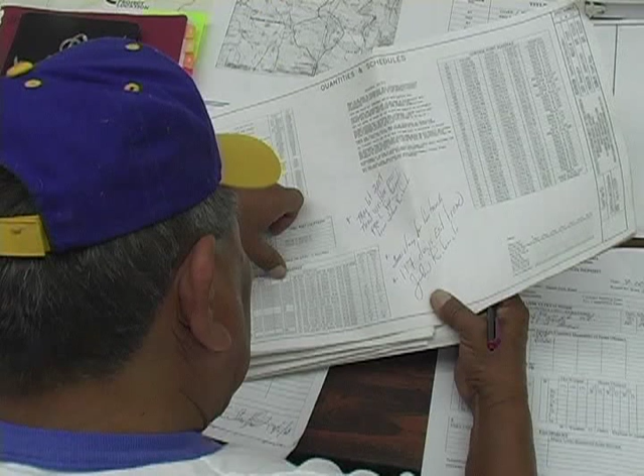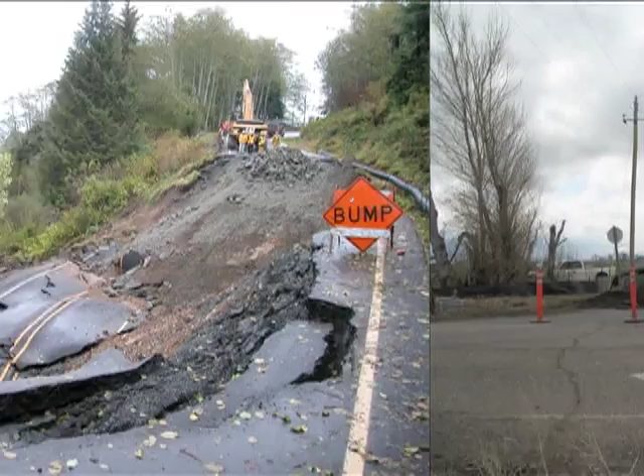The Road Construction Inspector, or CI, has a very important job to do. It is up to him or her to make sure that a road construction project is being carried out as planned, in every detail. Without proper inspection, the final product, which is a road that thousands of people may travel for many years, could fail. This failure may cost your tribe thousands of dollars to repair. Even worse, it could cost residents of your reservation their very lives.

Welcome to this presentation on tribal road construction inspection and documentation. During this program, we'll explain the duties of the construction inspector and demonstrate the proper ways to carry out those duties. We'll closely examine the various reporting forms and other documents that you'll be using both in the field and in your office. The information we're presenting here is also available in the Road Work Ahead guide that accompanies this DVD, which contains more in-depth information on this subject. The guide also contains definitions of some of the terms we'll be using. We've got a lot of ground to cover here, so let's get started.

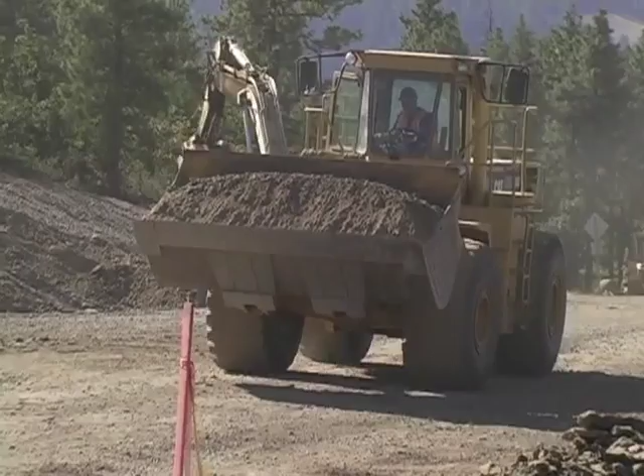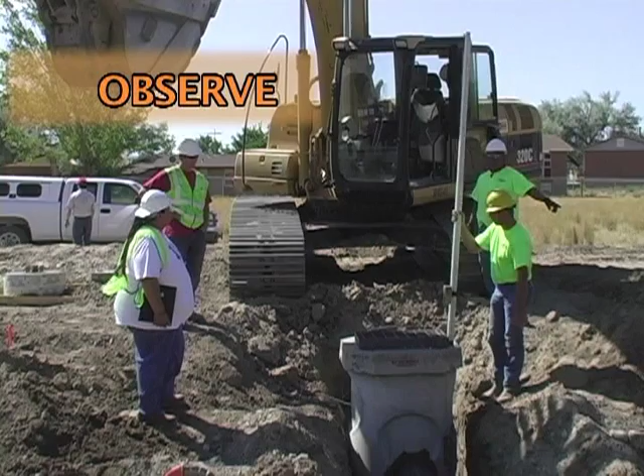To be a construction inspector, there are three basic things you must be able to do: observe, record, and communicate. That is, observe the details of what's happening at the construction site on a day-to-day basis. Record what you observe in a standardized way on a regular basis, and communicate what's happening to other individuals and agencies that need to know.

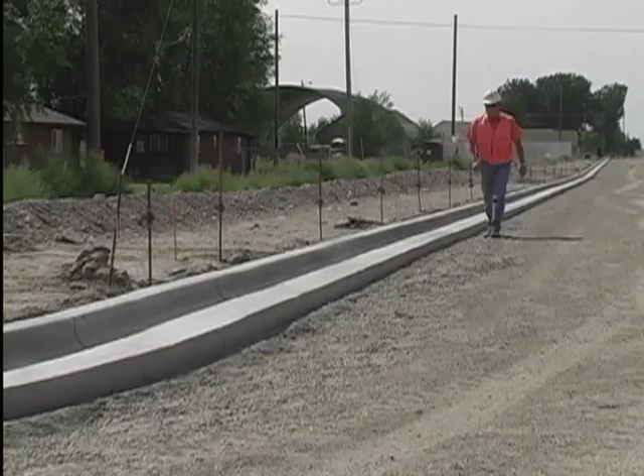In order to do the job properly, you should be the first person on the site each morning and the last person to leave at the end of the day. That way, you don't miss any critical construction activity.

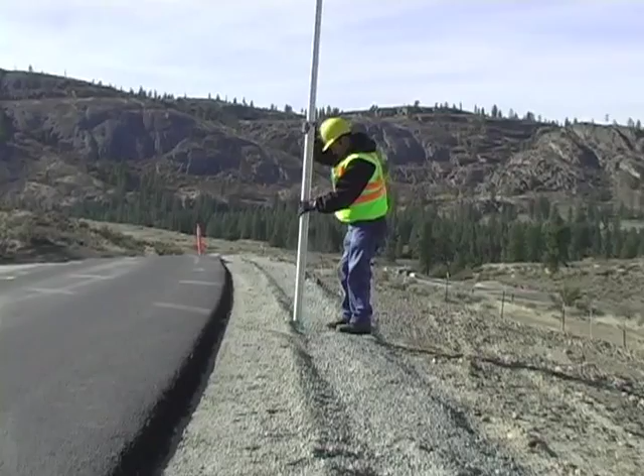The main purpose of these tasks is to be able to confirm and document that the construction contractor is complying with the terms of his contract, which assures overall quality of the project and allows the project owner to make payments to the contractor. Every approved construction project starts with a set of plans and specifications that provide the details on all aspects of the job.

It is part of the job of construction inspector to be thoroughly familiar with these plans and specs. So, before ever going to the construction job site, the inspector must take time to review these documents and mark up or use post-it notes to cross-reference items to watch.

Every construction project accumulates various documents as the project progresses, and these documents must be organized and safeguarded, so they are usually kept all together in the project master file. This file box is something an inspector needs to access almost every day during a construction project.

Now let's review the official duties of the construction inspector. If you have a copy of the guide, you may want to follow along in Part 1.

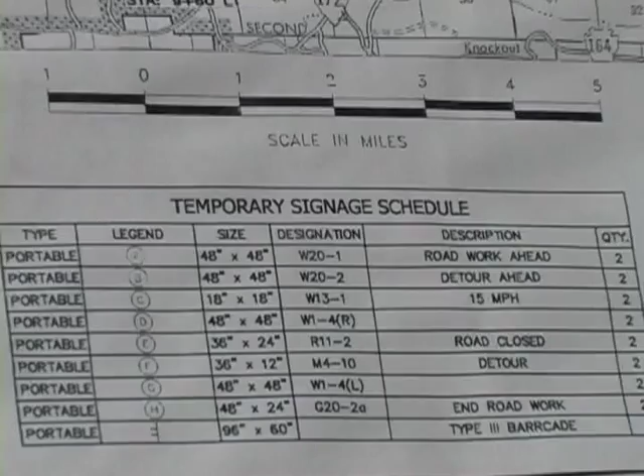Number 1. The inspector must be able to read, comprehend, and interpret all elements of the project plans and specifications. This includes such items as addenda, change orders, detail sketches, temporary traffic control plans, erosion and sediment control plans, as well as sampling and testing schedules. For definitions of these items, check the glossary in the back of the accompanying guide.

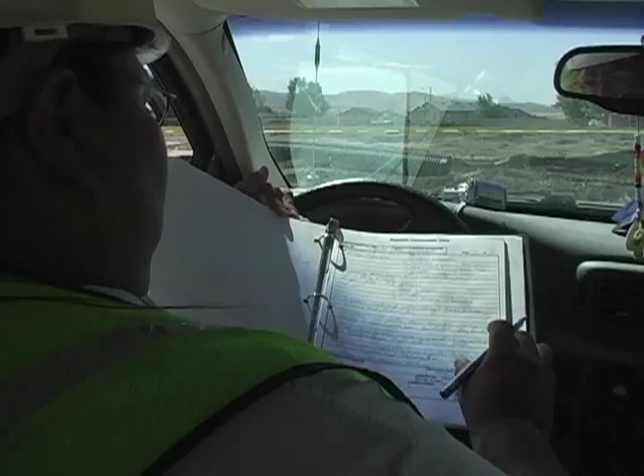Number 2. The inspector must keep and maintain daily construction reports of field observations of construction activities, materials, testings, equipment, employee working hours on the project, delays, weather conditions, unusual activities or events, mishaps, and accidents that occur at the job site, all being referenced to centerline stationing and pay items.

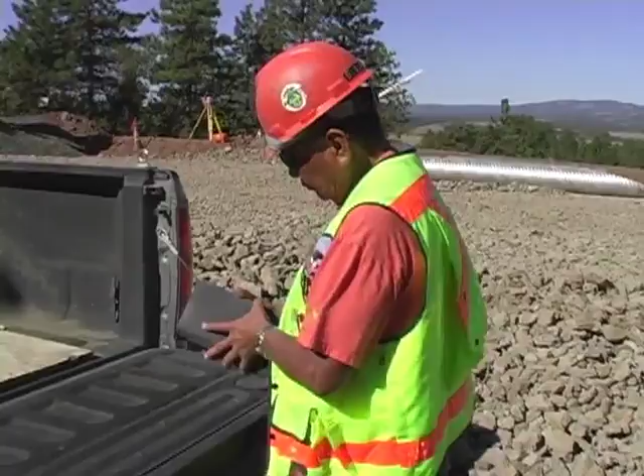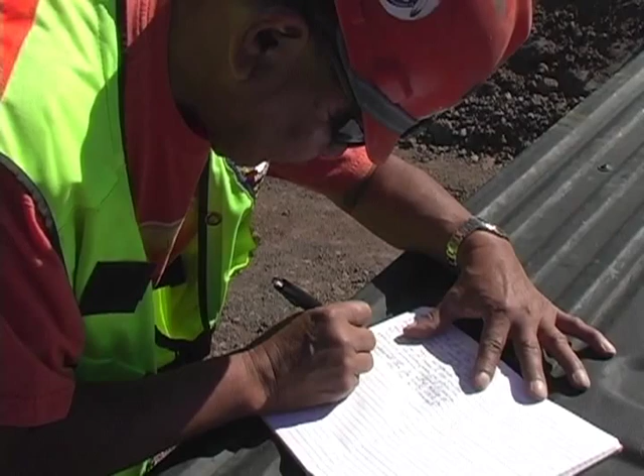Number 3. Keep and maintain a project diary for recording working hours on the project site, data relative to extra materials or deductions, weather effects, list of visitors to the site, conversations and discussions of differing opinions or disagreements with the contractor that may result in disputes or delays, including rejections and reasons. The daily diary should be signed by the field representative each day.

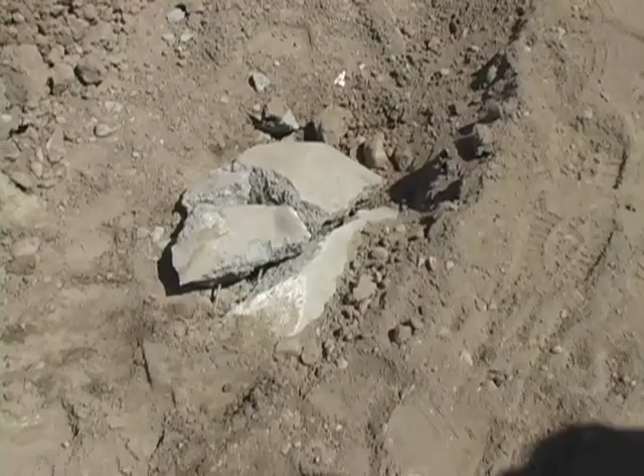Number 4. The inspector must be able to identify and note any unsatisfactory materials or work. Clearly inform the contractor superintendent of any unacceptable or defective work or materials with a written follow-up and copies sent to the COR.

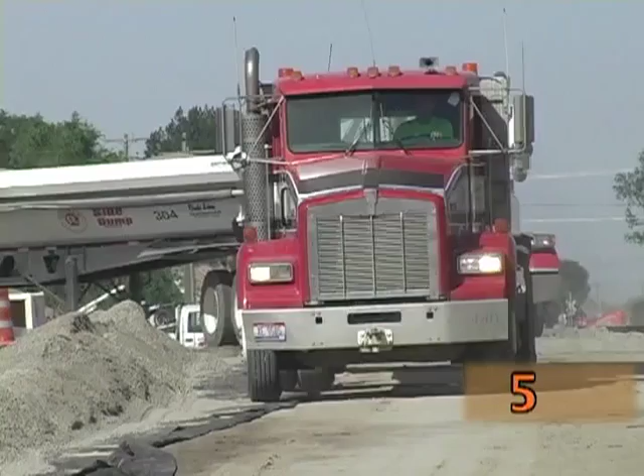Number 5. Check that all materials arriving on the project site are in compliance with the project specification requirements. Obtain test reports, analyses, and manufacturer certificates prior to the incorporation of materials into the project.

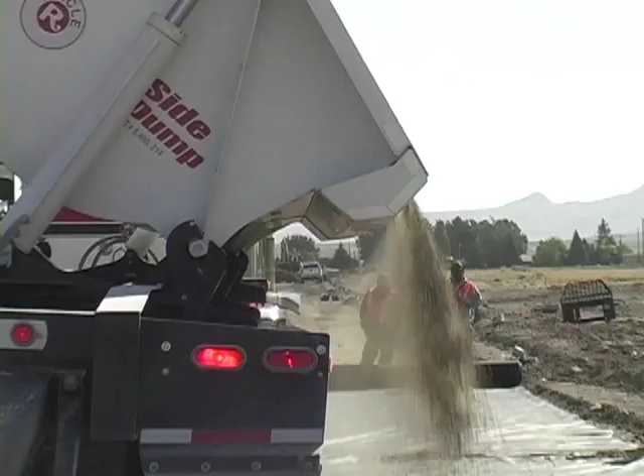Number 6, confer with the COR and contractor on the monthly estimates for pay requests. Verify the work completed and assure quantities indicated on the estimate match the recorded quantities.

Number 7, make sure that all permits are obtained and posters to be publicly displayed are in place.

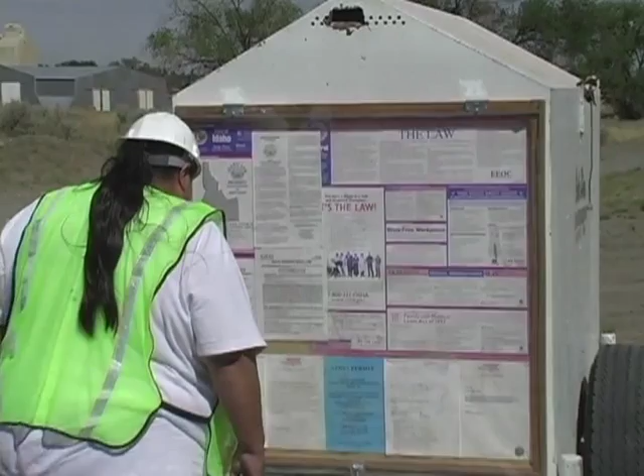Number 8, attend the pre-construction conference, progress meetings, and any project-related conferences when contract work activities permit.

So to recap, can anyone tell me the 3 basic tasks a construction inspector must be able to perform? Observe, record, and communicate. That's right. Now, before we go on, does anyone have any other questions?

If a contractor is out of compliance in the contract, are you supposed to make him stop and tell him what he's doing wrong? No, the inspector can't tell the contractor to stop work, nor can he tell the contractor what to do, and we'll cover this in a little more detail in a few minutes.

The inspector's duties include monitoring the quality of materials and the quality of work, as well as interacting with the contractor's representatives on a day-to-day basis. These duties are as follows.

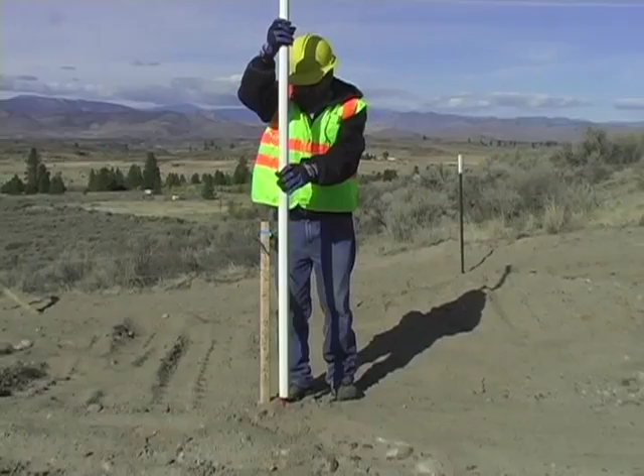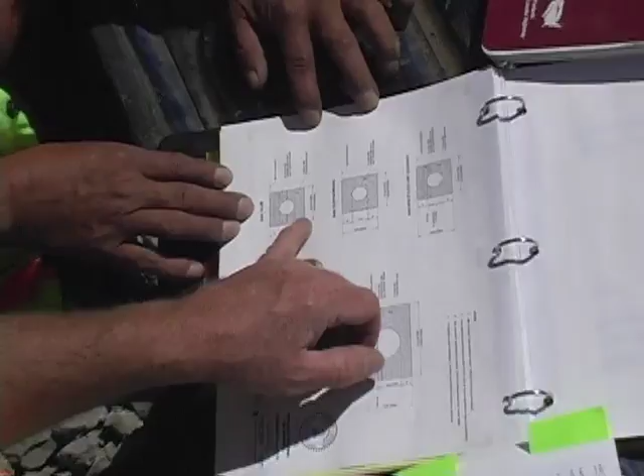Number 1, check stakeout, survey, or other prescribed specifications required in order to perform the work included in the construction contract. Number 2, answer technical questions of the construction contractor, clarifying but not changing the construction contract requirements.

Number 3, measure or verify the quantities of work performed for the project owner's receiving report. Number 4, make qualitative or quantitative judgments that may be required by the contract at the site of the work. For example, determining if specific sections of guardrail can be salvaged.

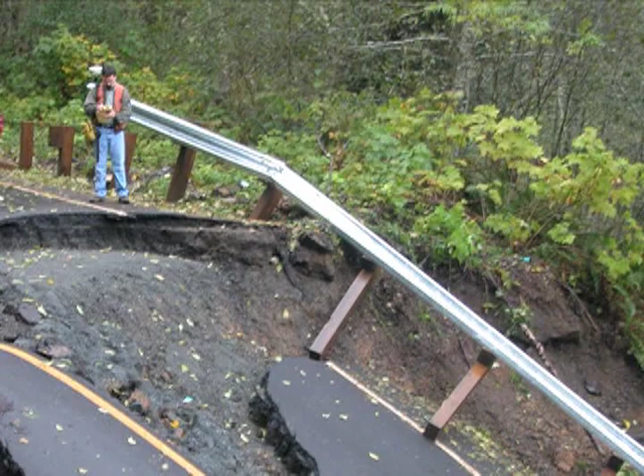Inspectors' duties include providing current documentation on project progress, using systems and methods developed by the tribe, by BIA, or the government agency responsible for the project. This documentation will include these components.

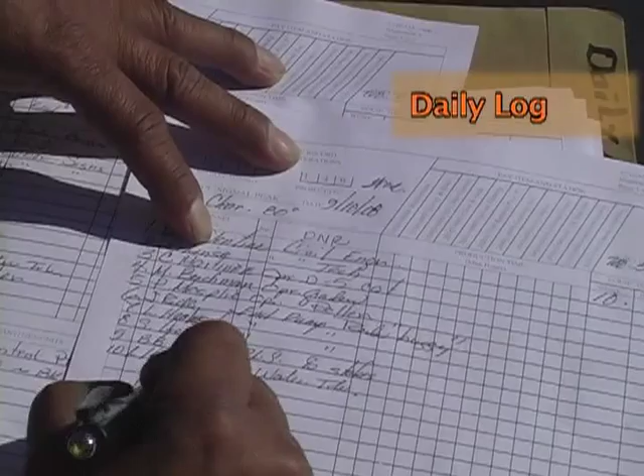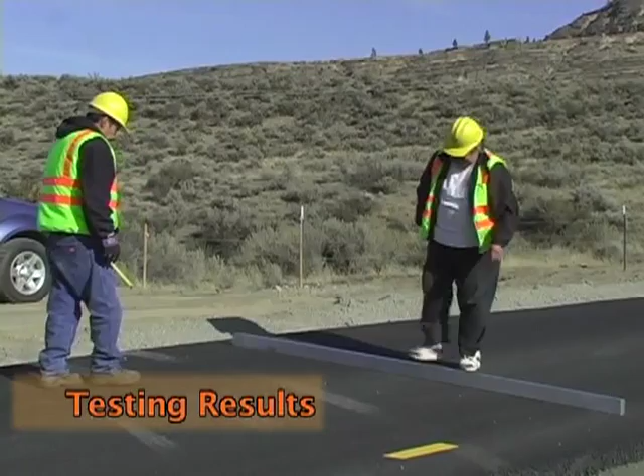Number 1, the inspector's daily diary, which provides narratives of activities, events, and discussions that have occurred at the job site. Number 2, the daily log, which records all contractor activities, including number of hours worked by each contractor employee and equipment location. Number 3, results of measurements, computations, and other activities supporting payment for all items in the contract.

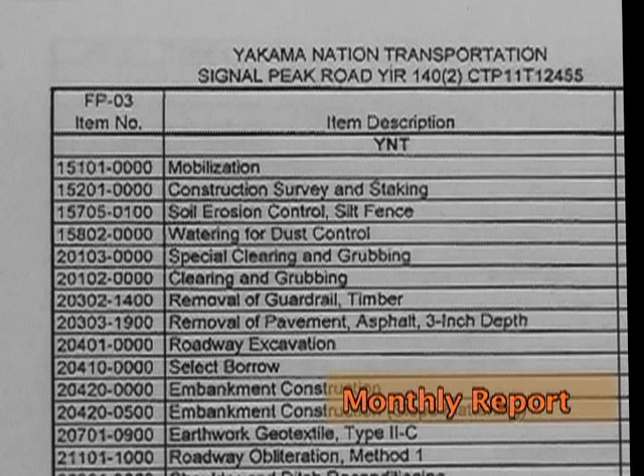We'll cover this in more detail later. Number 4, a monthly report and estimate of quantities to keep the project owner updated on the status of the project. Number 5, test results, measurements, and other documentation verifying the adequacy of the contractor's quality control systems and compliance with the terms of the contract.

Number 6, labeled photographs of the different construction operations, providing a pictorial record of the project's construction stages. We'll discuss this in more detail later.

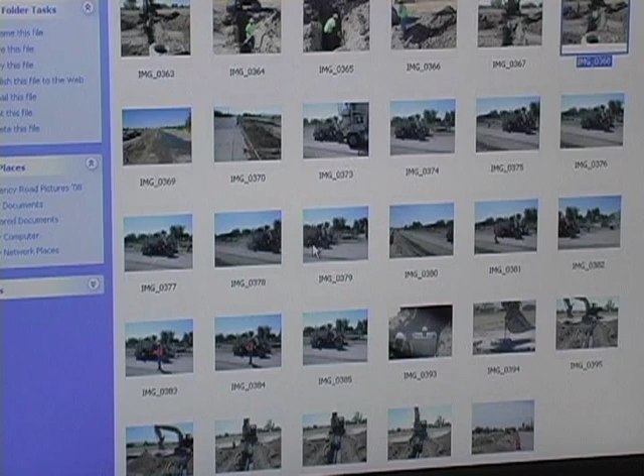Number 7, survey notes and records of other measurements that are for the project owner's final record to check, adjust, or locate the various features of the project as they are constructed. An original of each of these items should be provided to the project owner and becomes property of the project owner.

We had a question earlier about what an inspector can and cannot do on a job site. Inspectors have very limited authority. Essentially, an inspector doesn't have the authority to tell anyone on the project what, when, or how to do anything. Remember, the inspector is there to observe and record.

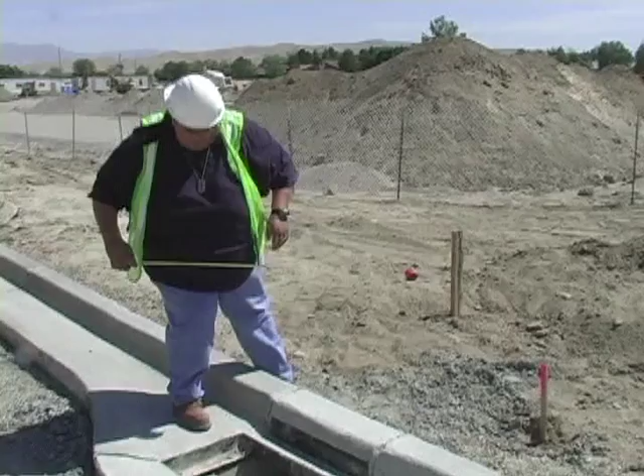Also, an inspector must record any deviation from the project contract plans and specifications and notify the contractor and the project manager. However, as I said earlier, the inspector cannot stop or cause any delays of the work in progress, except for imminent life-threatening situations.

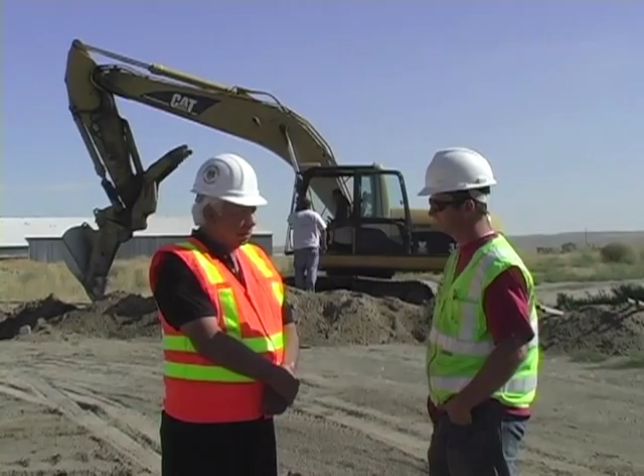Discussions concerning the contractor's organization, equipment, construction methods, or efficiency shall be handled by the project engineer, not the inspector. Also, orders that alter the contract specifications or create additional liability to the project owner must come from the project engineer. The inspector shall not

Advise or give instructions to contractor personnel regarding construction procedures or techniques, but should only ask what they are doing.

What if you see an unsafe practice on a job site? Say a dozer operator is not wearing his hard hat. Record what you observe in your diary, then inform the contractor superintendent and the project manager about what you saw.

It is the responsibility of the inspector's employer to provide the proper attire and equipment for the project. This is for the inspector's own safety and effectiveness.

An inspector must wear to the job site a hard hat, steel-toed safety shoes, safety vest, and other items such as goggles or dust masks when needed. The necessary bound diaries, daily and weekly report forms, and other documents must be provided by the inspector's employer.

Items that construction inspectors often use in the field include infrared thermometer, engineering scale, calculator, measuring tape, and field guide for work zone traffic control.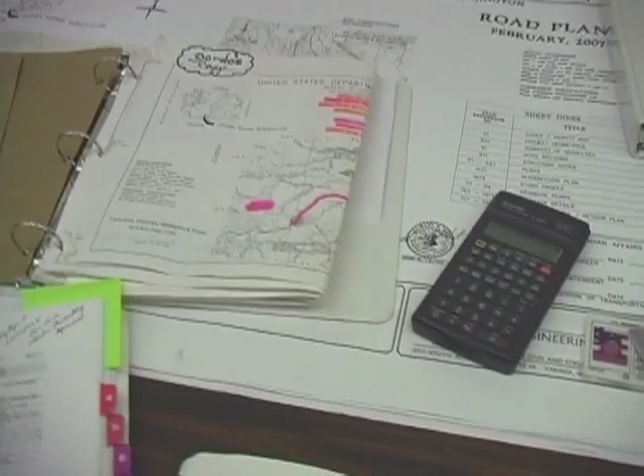The project diary is one of the most important records made during the progress of construction. Diary entries should therefore be factual, concise, complete, legible, and written in ink. When properly maintained, the project diary provides valuable information and evidence when disputes about the project arise later.

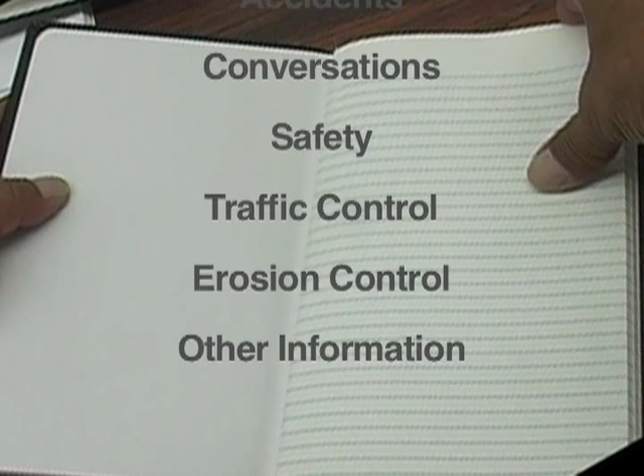You should include the following information in your diary: date, names of visitors to the site and purpose of visit, progress of construction work, explanations of why work was not completed on schedule, accidents that occur on site, the substance of important conversations with the contractor, comments on construction safety, comments on traffic control and signage, discussion of erosion control and other environmental concerns, and any information not covered in other reports that may have a bearing on future developments.

Remember to sign each day's entry with a full signature, not just initials. The diary is considered to be an official government document. It is to be safeguarded and turned in with all other project records at the conclusion of a project.

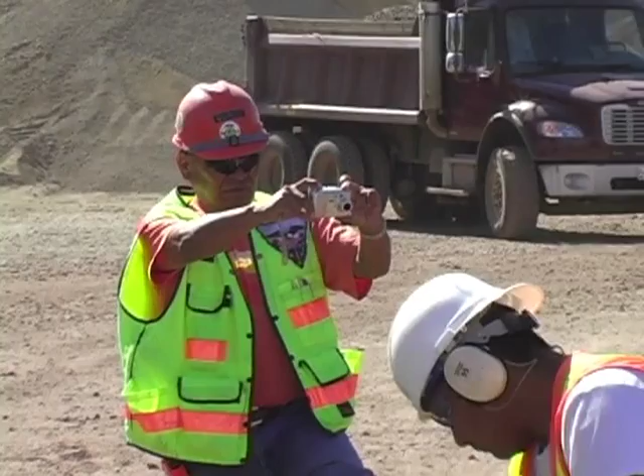The use of tape recorders, sketches, and photographs during construction is considered very beneficial, particularly if disputes arise later. Tapes, drawings, and photographs should be noted in the diary.

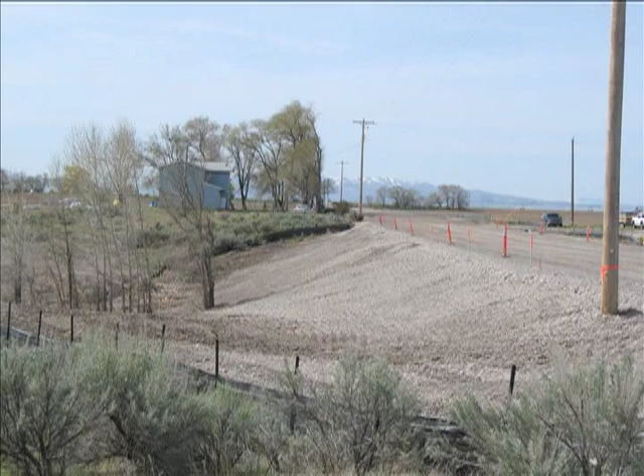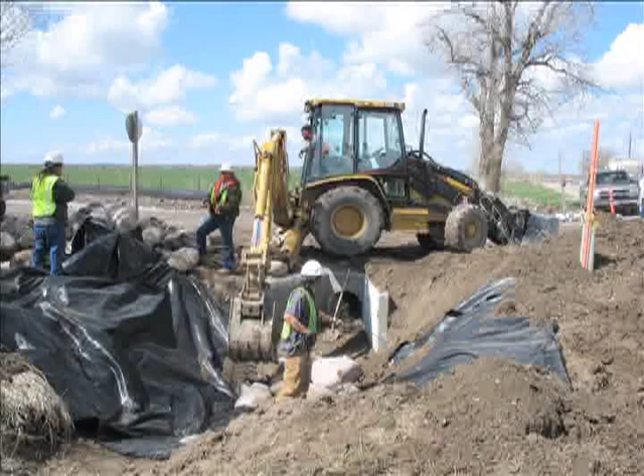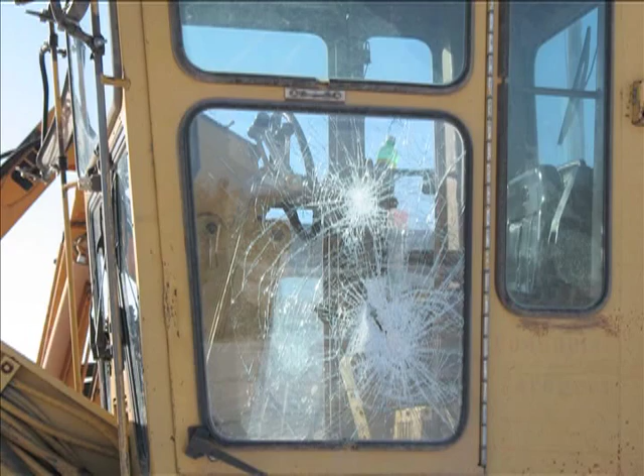Photographs can be an important part of a project's records. The old saying, 'A picture is worth 1,000 words,' applies here. Photos serve to document unusual occurrences, such as mudslides, cave-ins, floods, or actual conditions when a contractor alleges differing site conditions. They can also document unusual construction features, non-conforming material or methods, accidents involving death, personal injury, or property damage, encroachments within the right-of-way, and other such occurrences and conditions.

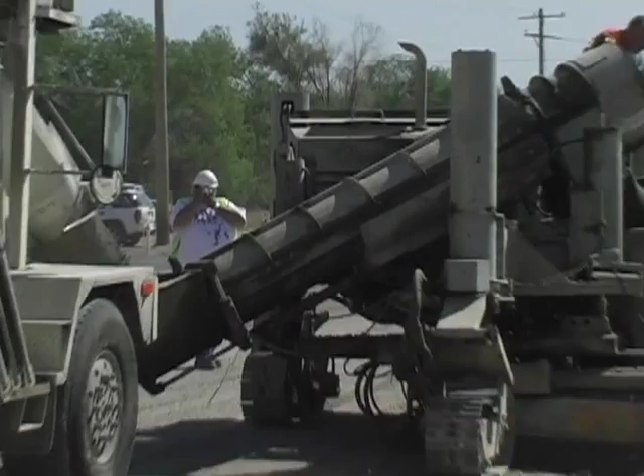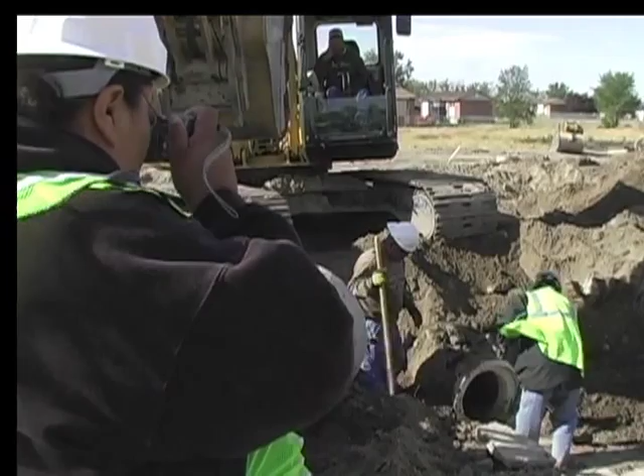They are invaluable as evidence in case a controversy develops during the construction contract which results in litigation. They are especially useful when a construction contract encompasses a long period of time, as much as 2 or 3 years. As memories fade and project personnel are transferred to other projects, photographs provide direct evidence of the conditions that existed at the time the dispute arose.

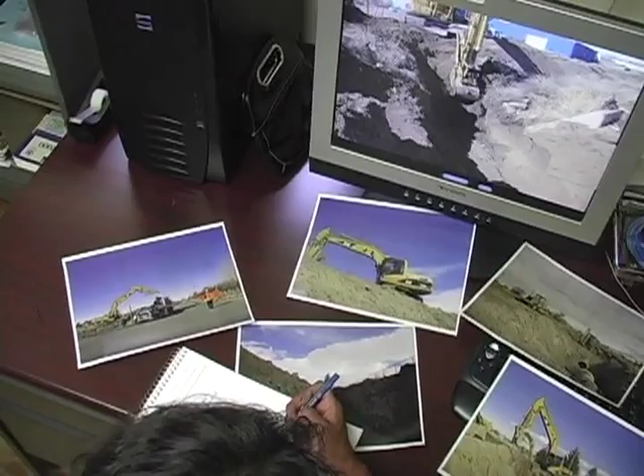Clarity of the photo and good composition are very important, and proper identification is necessary. The back of the photo should be labeled with the name of the photographer, the date taken, and the location. No photo log is required as long as the photos are properly identified.

The daily log is a specific form that must be filled out and submitted at the end of each workday. It summarizes required, specific information about that day's construction activities. In combination with the project diary, the daily log will supply support documentation for negotiation with the contractor concerning contract modifications, price adjustments, and possible claims.

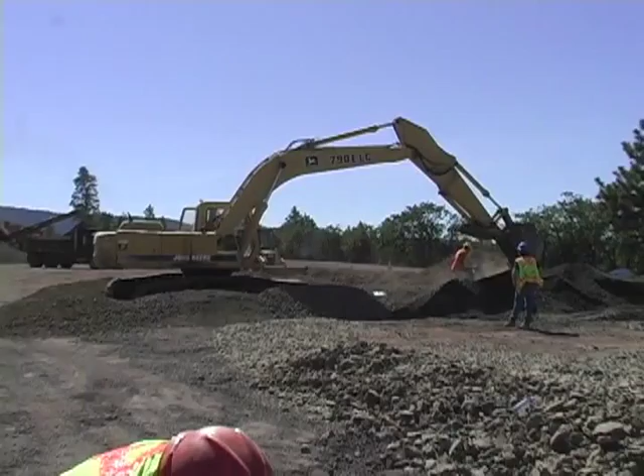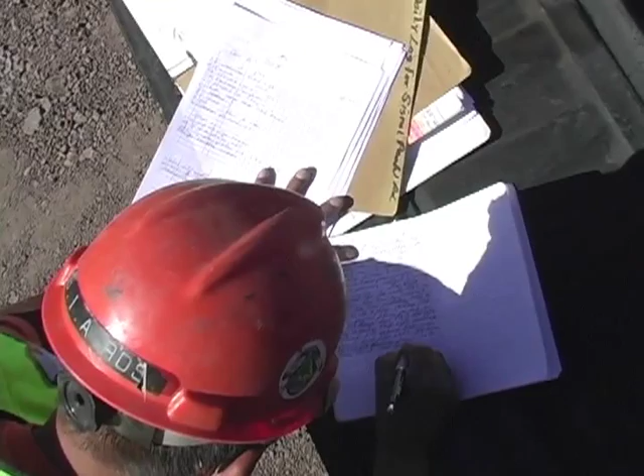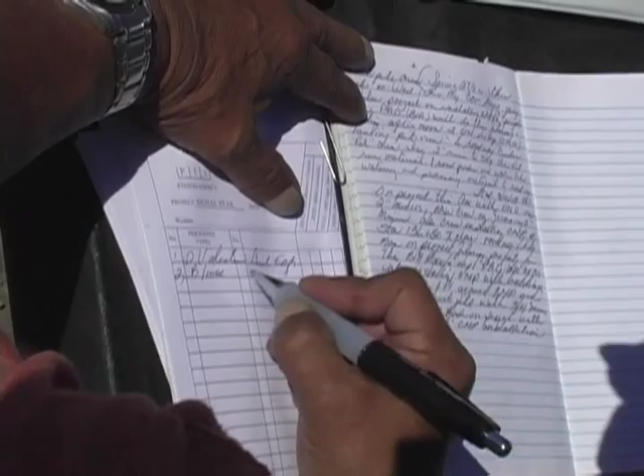Some of the information that goes into the diary will also go into the daily log. One major difference is the diary always contains information about conversations with the contractor or his representative and a narrative description of the work in progress. The daily log, on the other hand, reports the day's weather conditions, locations and number of men, which equipment is working and which is not, and the amount of production.

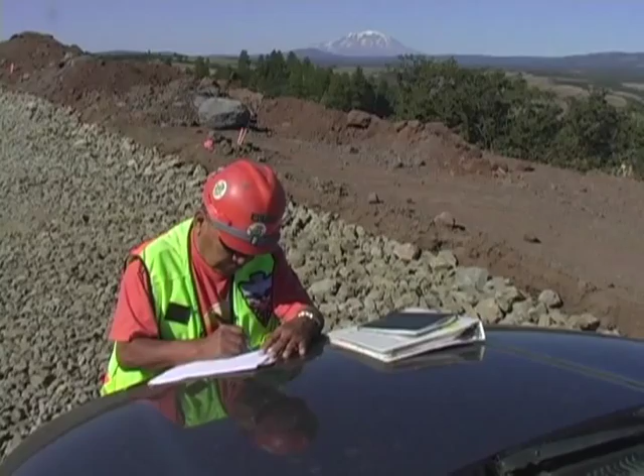The daily log shall be used to document the details of all construction operations that require inspections for conformance with plans and specifications. This form provides a concise, readily retrievable record of equipment time and man hours for each significant construction operation underway on the job site.

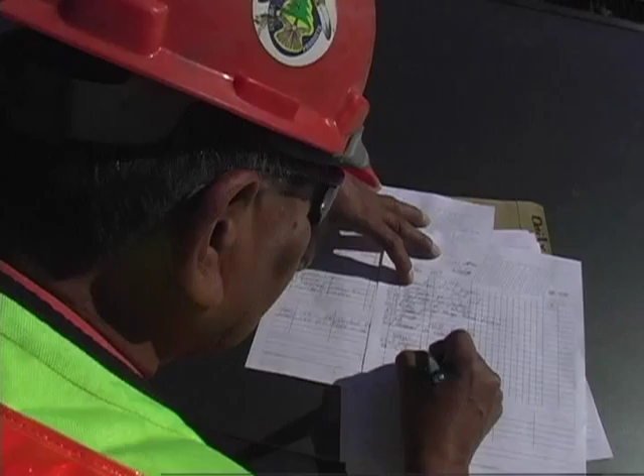This record will help verify contractors' costs to justify payments, adjustments, or claims. An important fact to remember is the failure to record an event in the log carries with it the implication that the event did not occur or was insignificant, and also threatens the credibility of the entire log. The inspector's daily logs are to be filed in the project master file at the completion of the project.

Question: Do weather conditions go in the diary as well as the daily log? Answer: You can put them in both if it's helpful, but that information is required in the daily log.

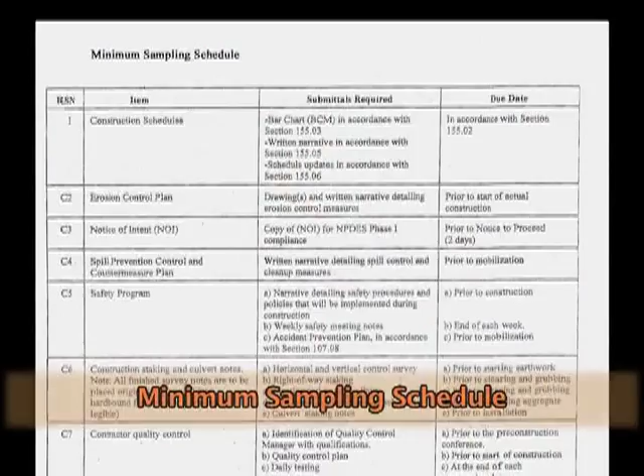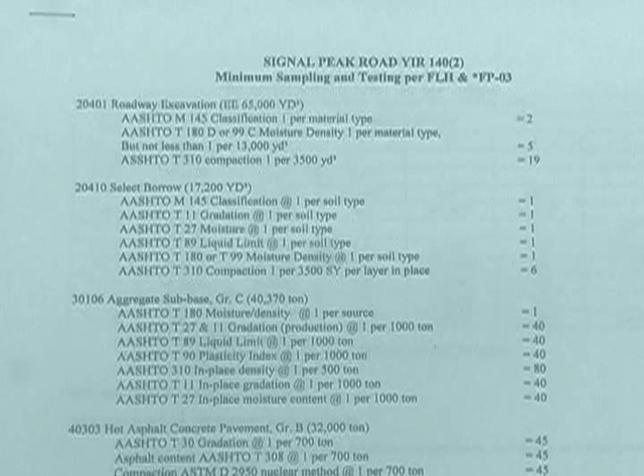A part of the project specs for every construction project is something called the minimum sampling schedule. This document contains the requirements for minimum testing and sampling of materials delivered to the project. It dictates what type of materials testing and sampling must be done, and it is part of the inspector's job to track these items.

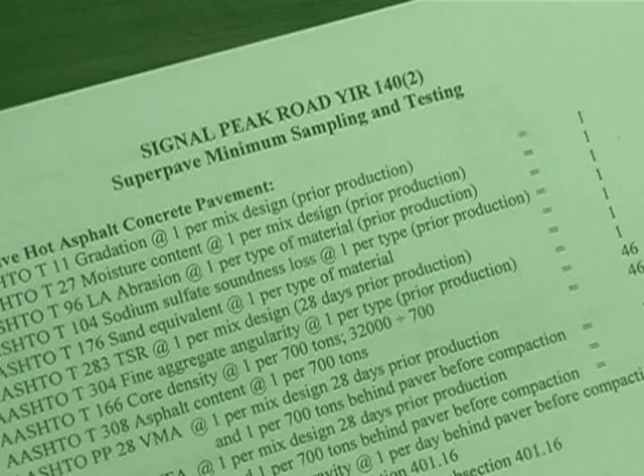The purpose of the sampling and testing performed on the projects is to determine whether or not materials being used match the project specification. There are several items used to document sampling and testing on the project.

First, there's the daily volume record. You use this form to record the delivery of all materials for the project. It provides spaces to enter the load number, truck number, time of day, location, and the volume of material. Material receipts and weight tickets that come with every load are stapled to the back of this form because they verify what you've entered on the daily volume record.

A new daily volume record sheet is started each day of the project.

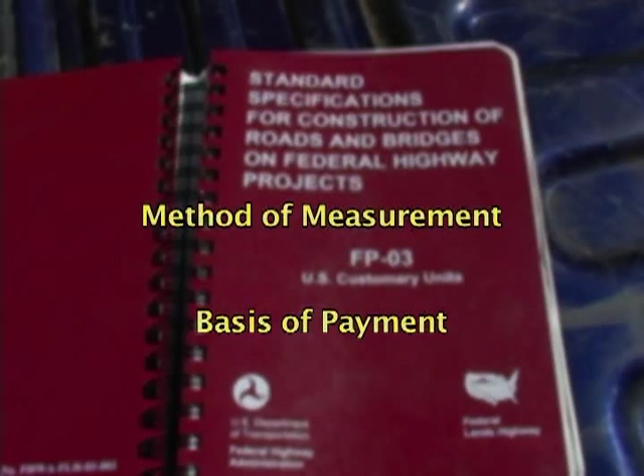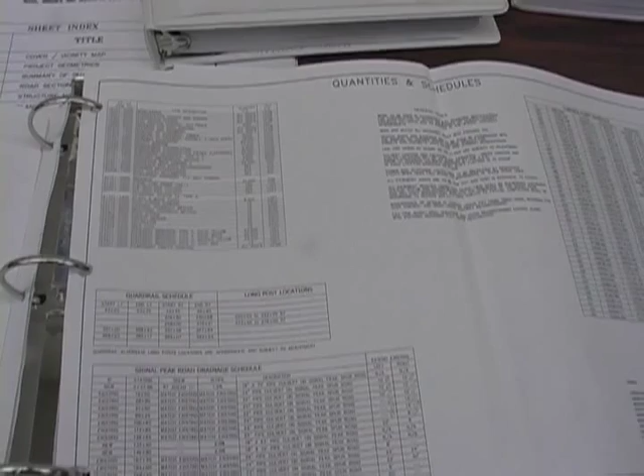Project specifications contain sections labeled Method of Measurement and Basis of Payment for each item of work. These dictate what units of measurement are to be used for the materials and on what basis a contractor can be paid. The daily volume record is used to track these items and to check against planned quantities.

These records are transferred to the daily log each day.

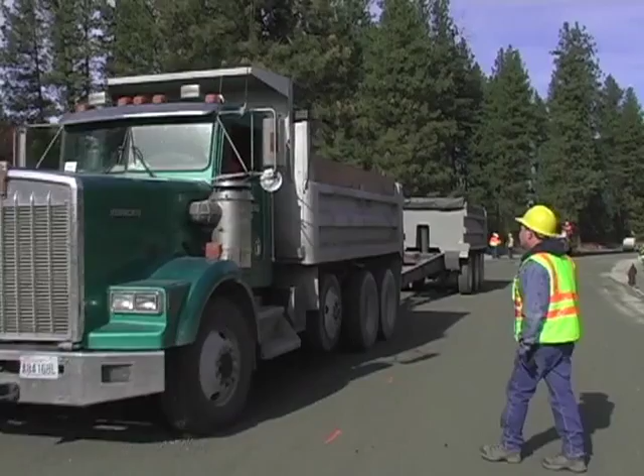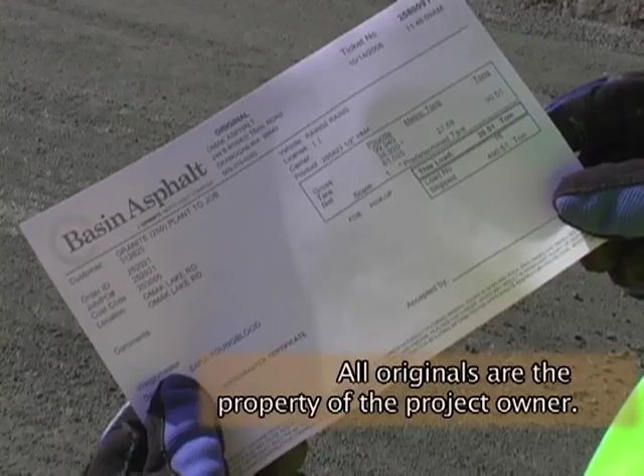The construction contractor must provide certifications of compliance for all materials to be placed on the roadway before they are installed. These certificates are to be retained at the job site and are to be included in the project master file. Inspectors must assure that every delivery meets specifications by checking the bill of lading. More specific instructions about asphalt inspection are located in the accompanying guide.

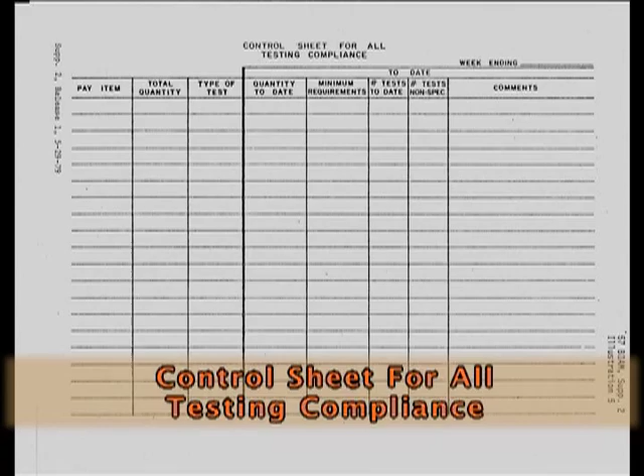Next, there's a control sheet for all testing compliance for each project. This sheet indicates the minimum tests to be taken for each item of construction to assure that adequate samples and tests are conducted during each phase of construction.

The original of this form is maintained by the inspector, and a copy is submitted weekly to the project manager.

Not all projects require the placement of culverts, but on those that do, detailed records of their installation must be kept. A document known as the culvert book is the primary source of information regarding the installation of culverts, if project plans call for them.

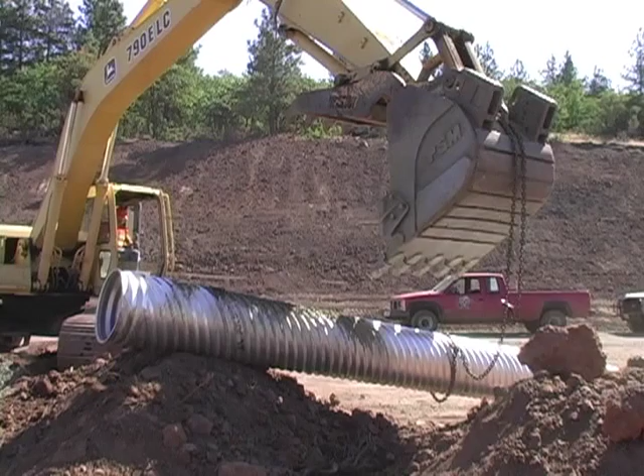Using the project ledger pages for documentation, records for the culvert book include the record of structural excavations if payment is provided for, complete and detailed stakeout notes for each installation, including sketches, stake locations and offsets, and information on stakes, and description of structure such as cattle guard, culvert, reinforced concrete box culvert, bridge, catch basin, drop inlet, etc.

References to material certification must be included, along with size, length, location, skew, invert elevations, grades, date of staking, and date of installation or construction of structure with test notation and results.

Finally, quantities of rock, steel, and/or concrete, slope protection, riprap, or other items used in conjunction with the structure.

The weekly construction report is a valuable tool for summarizing key information on a weekly basis. This report keeps the project owner and the contracting officer up to date on the project's progress. This report calls for very specific information to be summarized and generally covers major portions of the project as follows:

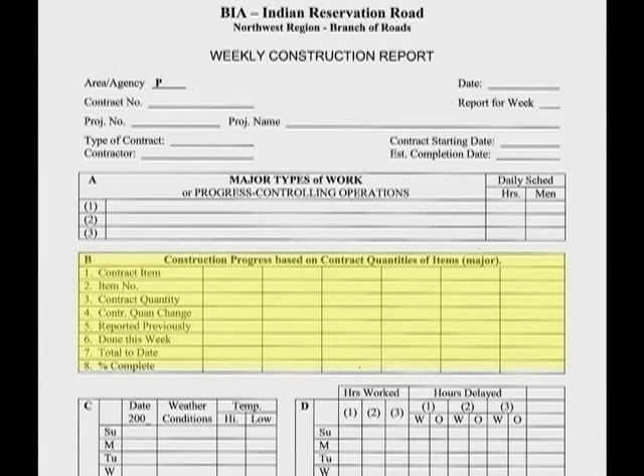The major types of work being performed during the week and units accomplished. The construction progress being made is indicated by individual contract deliverables and percent complete. Weather conditions and amount of man-hours clocked for the week.

The equipment put into or taken out of service, and brief narrative summaries including engineering comments, overall construction comments, plus general remarks on the issues affecting the project's progress, including delays.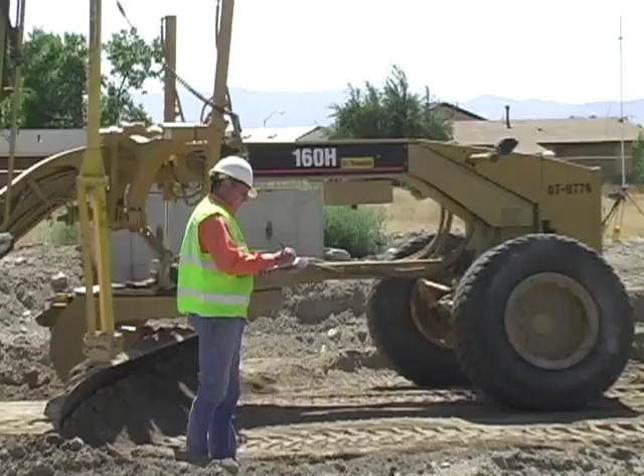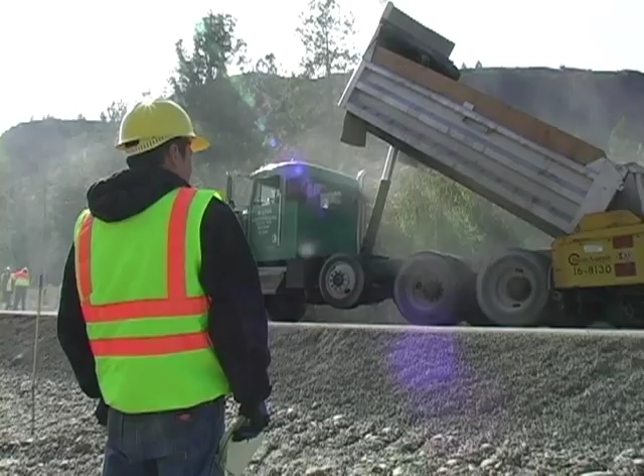In summary, I'd like to stress that the construction inspector plays a critical role in the execution of a road construction project, a project that could take several months and cost millions of dollars. Without the alert eyes and ears of the inspector, this project may not meet the standards and specifications it takes to create a safe, long-lasting byway that reservation residents may use for decades to come.